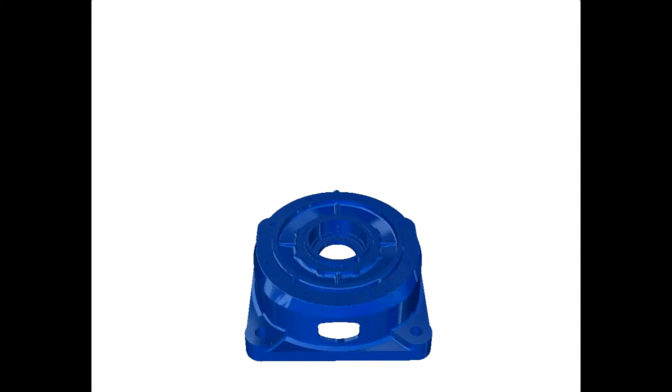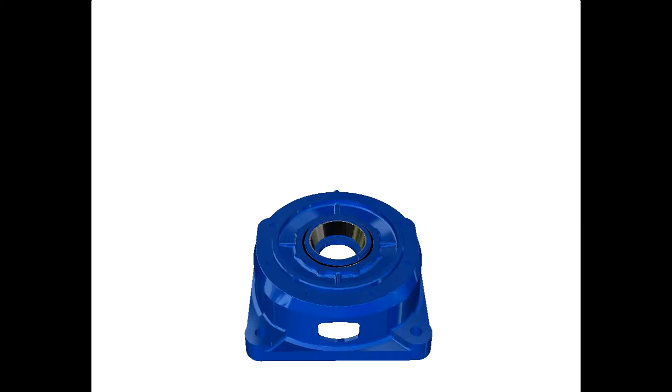This is the assembly instruction of the modular worm gearbox MV series. Insert the bearing cover in the external side bearing housing. Then insert the O-ring. Apply sealant on the bearing housing and attach the dry well with shims.

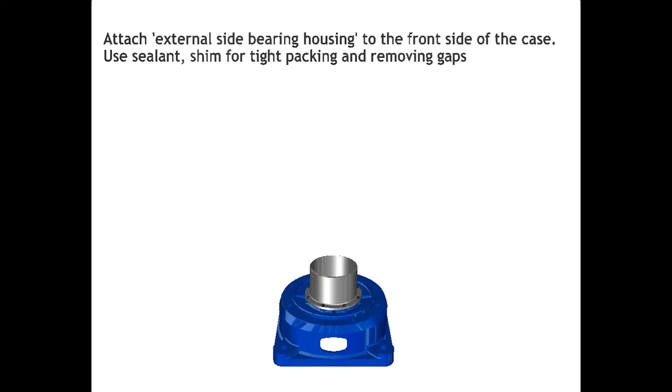Attach the external side bearing housing to the front side of the case. Use sealant and shims for tight packing and removing gaps. Insert the plug in the case.

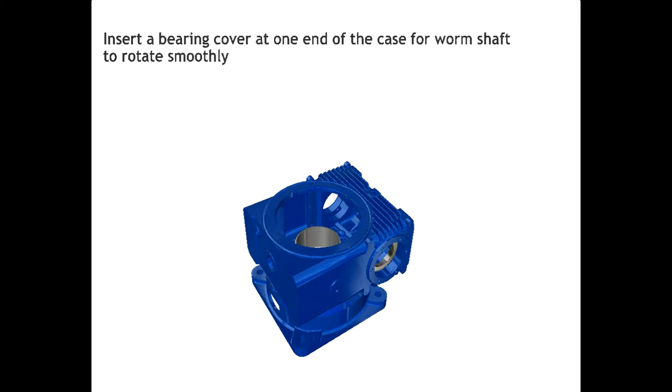Insert a bearing cover at one end of the case for the worm shaft to rotate smoothly. Insert the worm shaft sub-assembly from the other end of the case. Insert another bearing cover. Attach the worm line oil catcher to the case using shims.

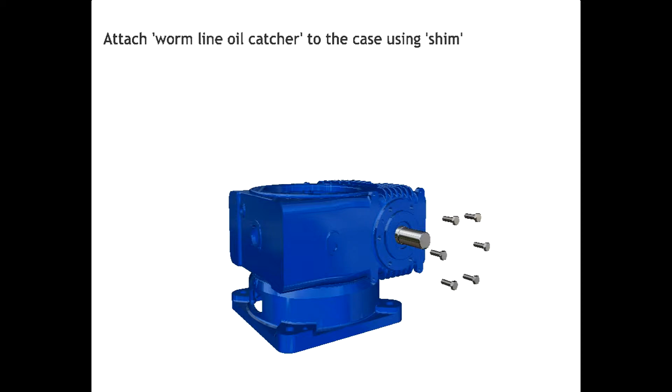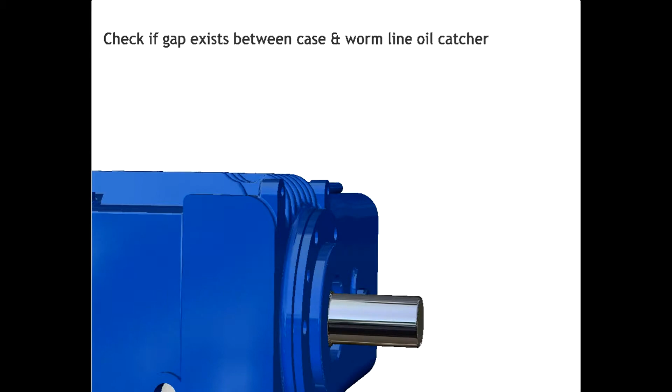Put the worm line oil catcher on the other side of the case. Check if a gap exists between the case and the worm line oil catcher. Verify how many shims are required to remove the gap. Remove the worm line oil catcher and attach it back temporarily using the identified number of shims.

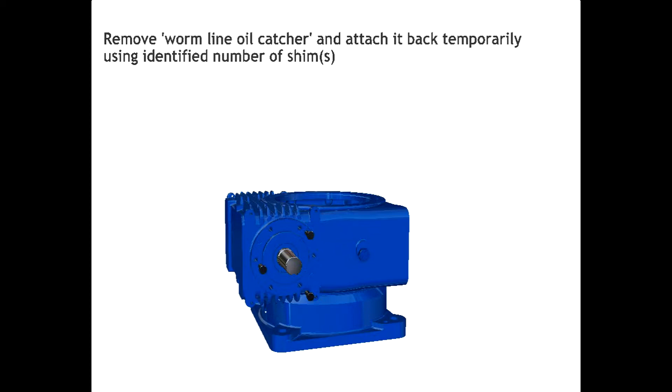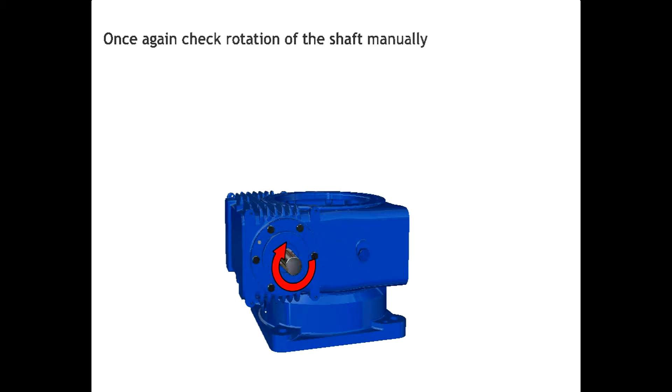Check axial play as per the requirement. Once free movement is verified, remove the worm line oil catcher and shims and apply the sealant. Put back the worm line oil catcher and shims and tighten with bolts. Once again, check rotation of the shaft manually.

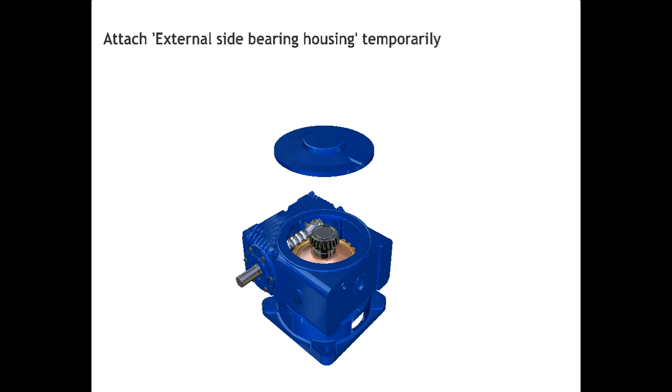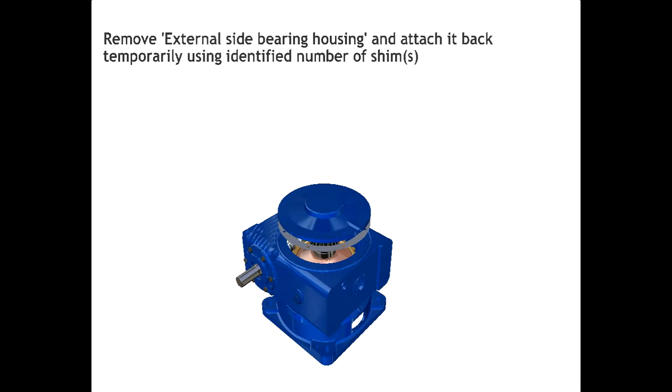Insert the worm wheel sub-assembly in the case. Attach the external side bearing housing. Verify how many shims are required to remove the gap between the case and the external side bearing housing. Remove the external side bearing housing and attach it back temporarily using the identified number of shims.

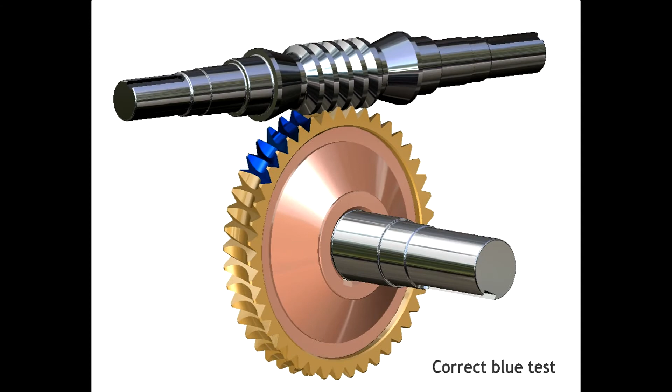Match the gear teeth of the worm shaft and worm gear and adjust axial play. Now perform the blue test. The blue test is performed to verify alignment between shaft and gear. Let us look at correct alignment. Apply the blue color on the worm wheel. Rotate the worm shaft. In a correct alignment, the blue color is sprayed on both the corners of the tooth.

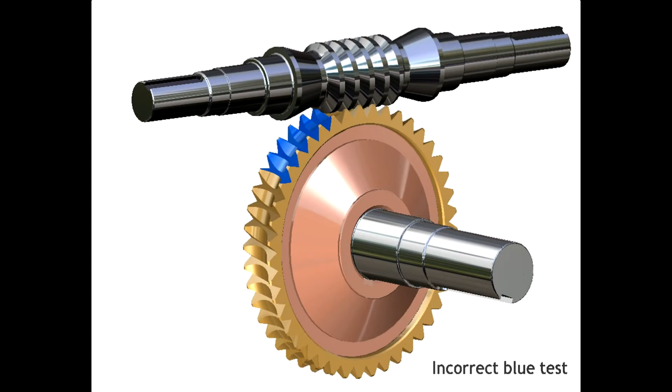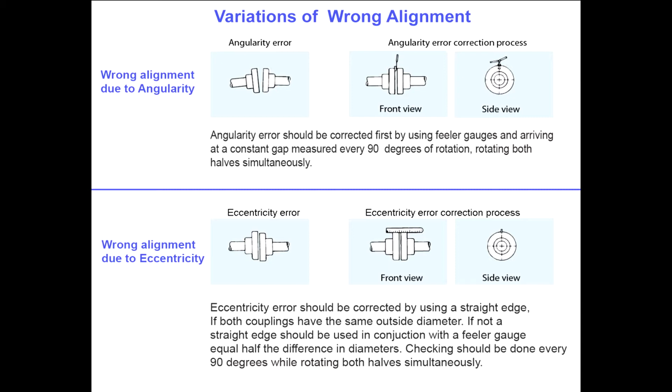Now let us look at wrong alignment. Apply the blue color and rotate the worm shaft. In case of wrong alignment, the blue color is sprayed across both sides of the tooth. The main reasons for wrong alignment are angularity and eccentricity. Angularity can be removed using a feeler gauge and eccentricity can be corrected using a straight edge. Now let us continue with the assembly.

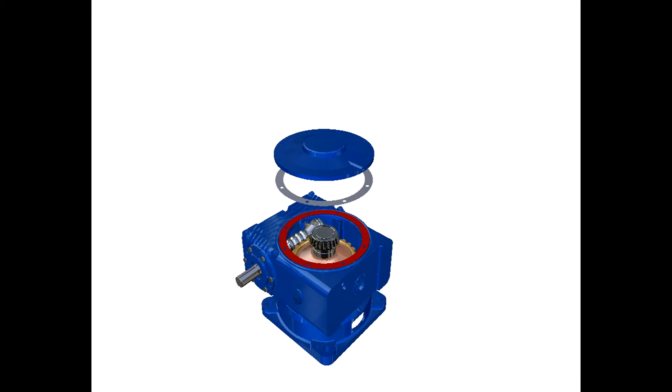Once matching is done, remove the external side bearing housing and shims to apply sealant to the case. Put back the external side bearing housing and shims and tighten with bolts. Once again, check rotation of the shaft manually.

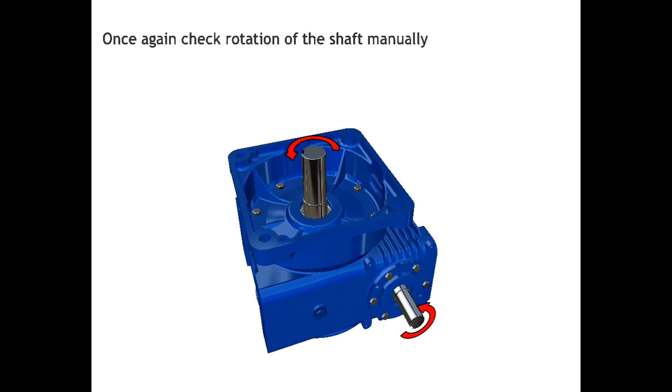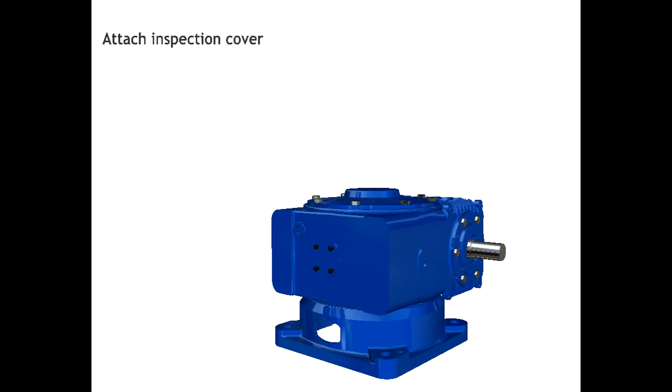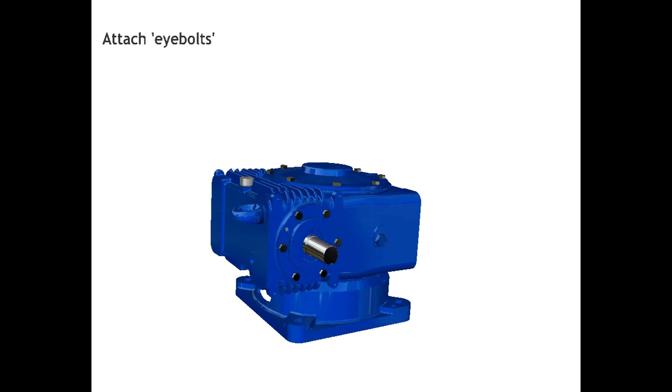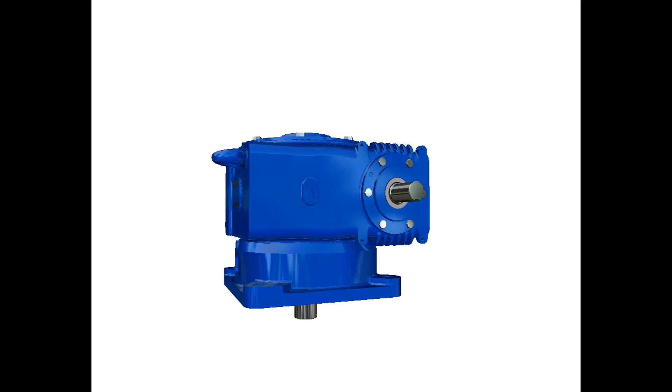Attach the inspection cover. Attach the ventilator to the case. Attach eye bolts. Insert oil seals on the outer end of the shaft. Attach the fan to the shaft, fit the fan cover, and this completes the assembly of the Modular Worm Gearbox MV series.